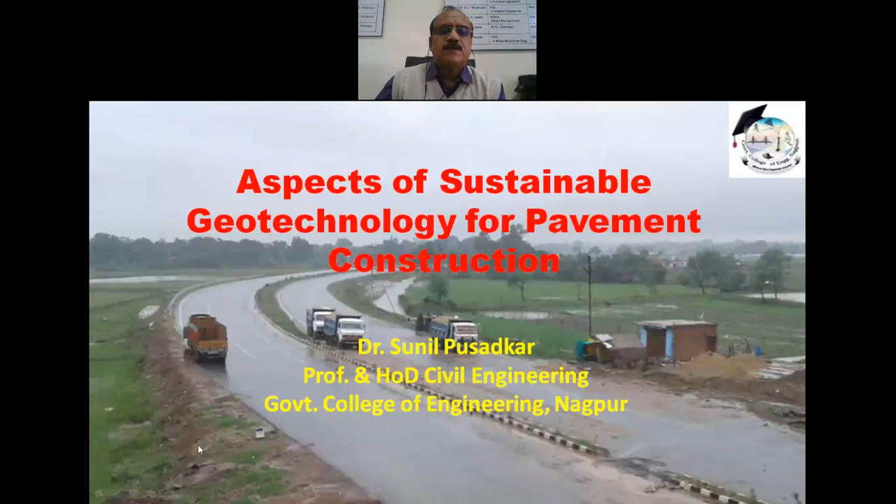the topic was aspects of sustainable pavement construction. I have changed it to my field, aspects of sustainable geotechnology for pavement construction. So in this, we are going to see the different materials and methods used for the improvement of the subgrade, and some aspects of pavement as well as slope protection with natural resources. So with this brief introduction, I will look to

my presentation. For transportation engineering, AASHTO 2009 has defined what sustainability should refer to, and it states that transportation's mission is no longer just about moving people and goods, it's much broader. Transportation fundamentally allows us to achieve economic, social, and environmental sustainability. So all three principles of sustainability are included, and transportation supports and enhances our quality of life. As state transportation professionals, we need to model the way towards a sustainable future. Sustainable transportation requires innovative approaches and partnership like never before.

So sustainable transportation engineering is not only the field of field engineers or only of researchers, but it is a conglomerate of all the persons who are involved in this process, and hence the responsibility rests with everyone.

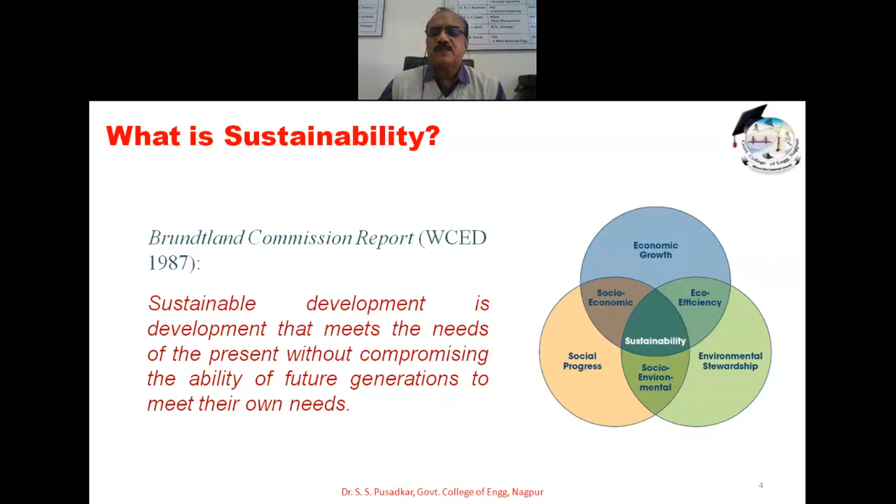Now, in the context of pavement, how should I make it sustainable? It should achieve the engineering goals for which it was constructed. That means for the road or railway pavements we are constructing, we have to keep the focus on the engineering aspect, but we also have to preserve and restore the surrounding ecosystem.

That is the main thrust which we should keep on sustainability: whatever way we are making the roads to any area, we have to preserve this ecosystem. And the best example is the construction of the national highway from Nagpur to Jabalpur. They preserved this ecosystem very soundly by providing many underpasses for the animals which are living in this particular area.

It also uses financial, human, and environmental resources economically. Definitely, for engineers the first fundamental principle is that you should go for economical design, and construction and maintenance should be kept minimum. Meet the basic human needs such as health, safety, equity, employment, comfort, and happiness. By the provision of pavement, we are able to provide these human needs, because if there is no road, no man can reach the hospital, no man can reach the office, nobody can even move.

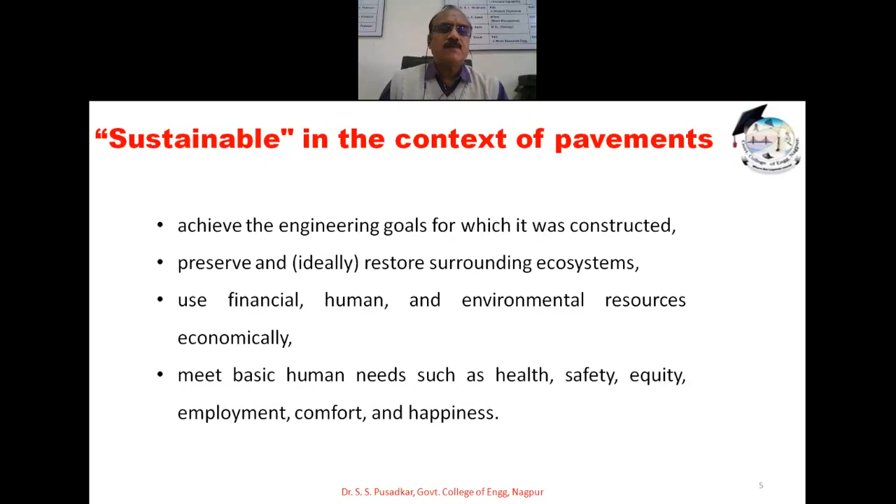And hence, if you keep this road network, which is more than lakhs of kilometers on the earth's surface, in a green way, definitely we will be able to preserve this earth in a sustainable way. Now, there are basically three parameters, as I discussed earlier: the environmental component, social component, and economic component of sustainability. With respect to pavements, it basically regards the energy consumption by the materials, during production, during construction, or whatever.

So the energy component plays a major role, because how much energy is required for preparing that particular material, or how much carbon dioxide is evolved during the preparation, we also have to take into account. Greenhouse gas emissions, noise, air quality, stormwater treatment, all come under this environmental aspect. If you look at the social aspect, it basically relates to safety, smoothness, vehicle operating cost, again the GHG emission through vehicles, access, mobility, and aesthetics. These are the various points covered under the social component for the pavement.

And the last point is economics. Definitely, we should achieve economy through construction, maintenance, and rehabilitation cost, and vehicle operating cost, crash cost also. So all these are the various points which refer to sustainability in pavements. But we will look at only two aspects: the energy consumption and the construction of these pavements.

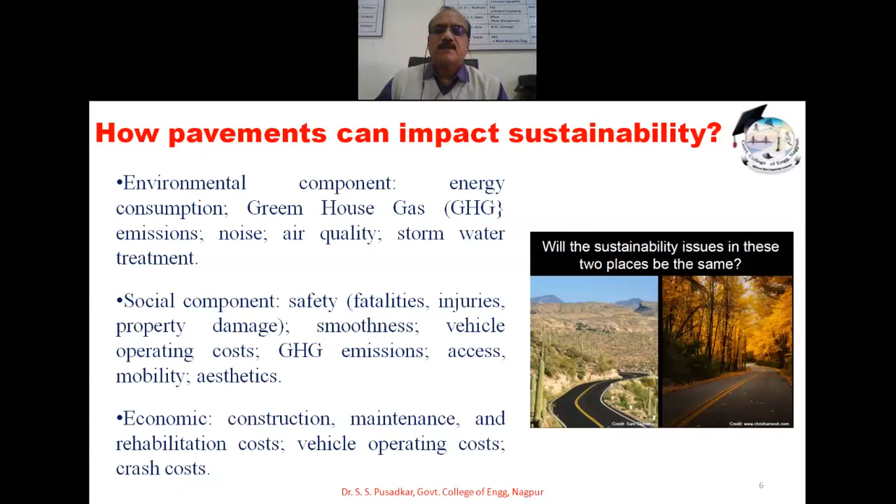Now, why the sustainability requirement plays a major role in the pavement. This graph is by Wagner, who has written Materials in the Economy. It shows how much of different varieties of materials were used in the last complete 100 years, the last one century. And out of all these materials, if you see, crushed stone, sand and gravel play a major role in the construction industry.

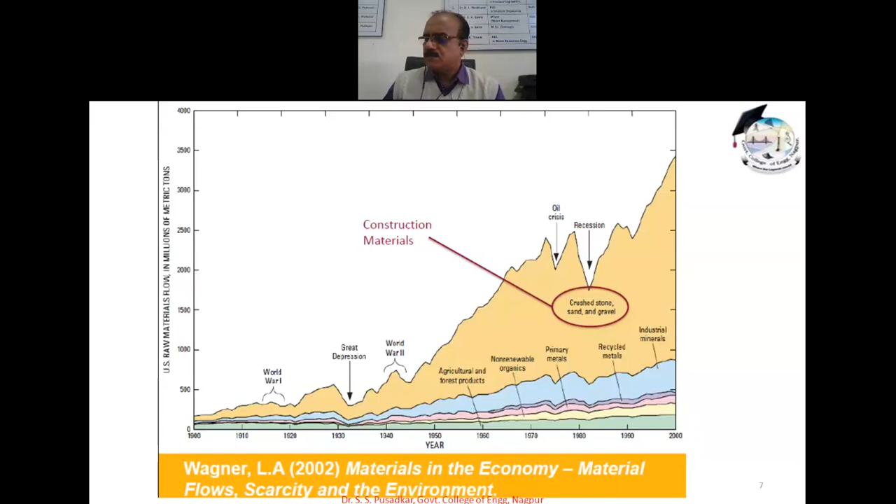Everywhere we are excavating material and using it for various types of construction. Most of the roads we are constructing are on the earth itself, and therefore there is excavation, there is construction of embankment. So a large amount of crushed stone, sand and gravel is utilized during the construction of these highways or any type of roads. Hence our prime focus should be on the construction material used for the construction of pavements.

Everyone knows about these two types of pavements. We have rigid pavements and flexible pavements, but all these pavements will be resting on the subgrade, that is the existing soil. Sometimes we need to improve the subgrade also, so that it is able to carry the load coming from the pavement or the concerned road. The rest of the portion above the subgrade will be sub-base course, base course and concrete pavement. The figure is the reverse way; that title is wrong, sorry.

And for flexible pavement we have the sub-base, base course and surface course, right? If you look at the flexible pavement, most of the material required is earth material; only the bituminous part is there. Even in rigid pavement, only the top is concrete pavement. That block is concrete pavement. So a lot of research and work is going on to reduce material utilization in the construction of roads. We will look at some of the areas where we are able to save material in the construction of these highways.

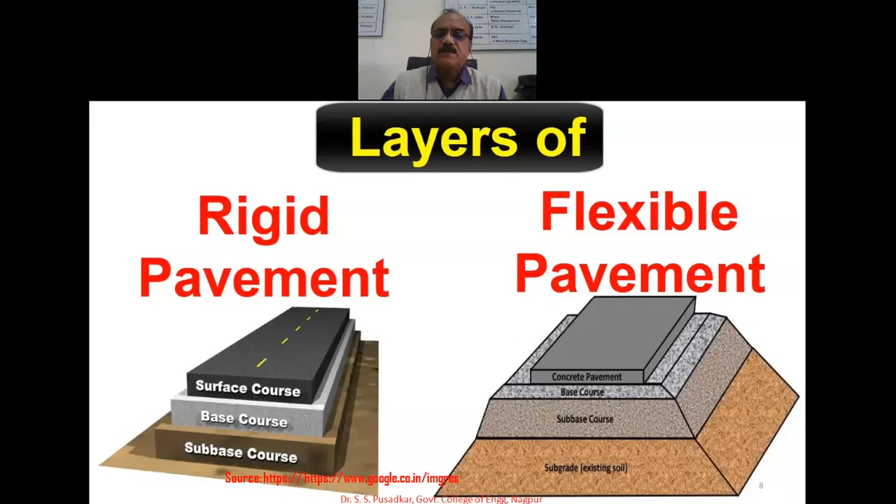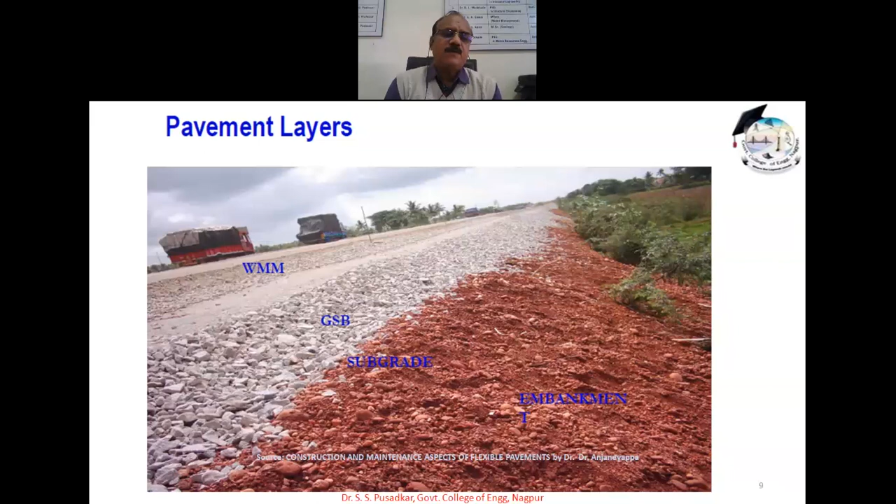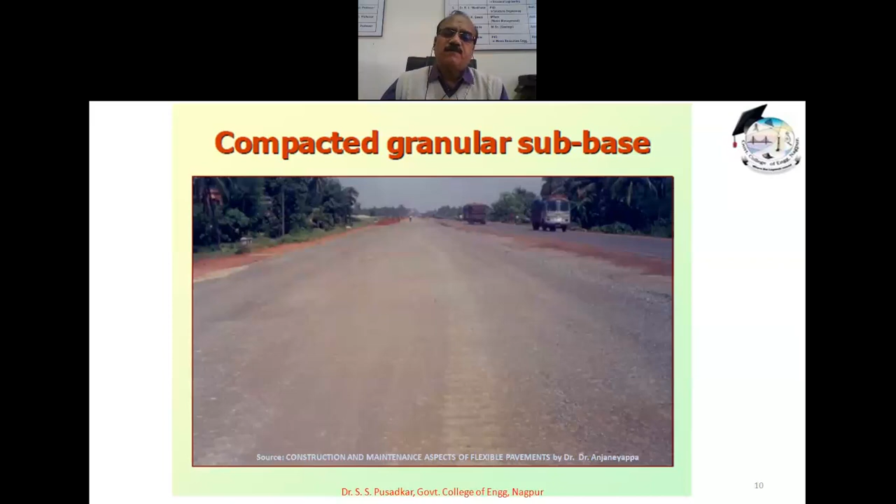And in these various layers we have, say, the embankment or the natural ground, then the subgrade, then GSB and then WMM, right? We can construct this sub-base also and compact it, and then we place our next layers on it. So how do recycled materials fit this requirement of subgrade as well as sub-base? Why do we need to use recycled material?

Definitely, if I use recycled material, I am taking a sustainable approach to pavement construction. I can avoid the energy and emissions associated with mining and processing construction materials. If I am using virgin materials excavated from the borrow area, I will dig out the hills, bring those materials and dump them for construction. So we consume energy for

excavation and construction, and a lot of that energy will be saved if I use recycled materials. The energy has already been expended in the first life of the recycled materials, so I can save it. It avoids the use of natural resources such as sand, gravel, limestone and oil. It also results not in landfill, but in comparable or better, longer lasting infrastructure.

Suppose bituminous roads exist now and we are constructing concrete pavements. The entire material is excavated, and then we start again placing the sub-base, base course and then the concrete pavement. Most of the material excavated from the existing road is nowadays being recycled and used in various ways. And a road made of recycled materials will definitely increase the service life

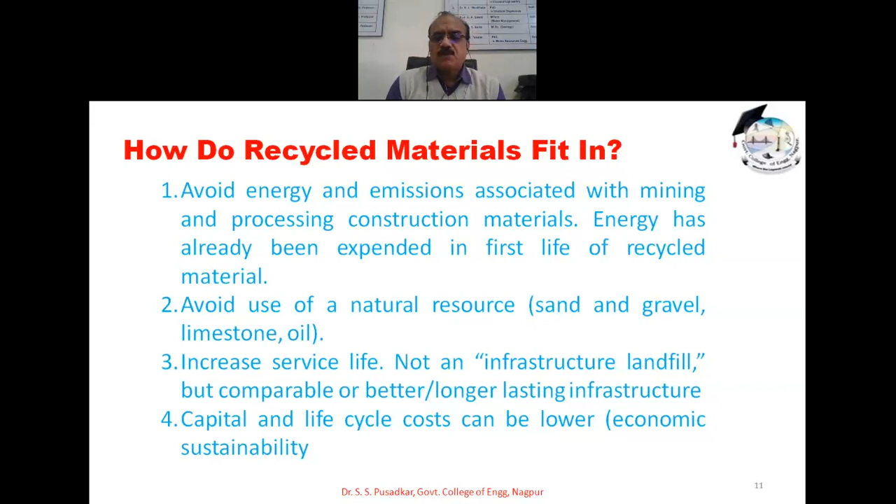also. Next, the capital and life cycle cost can be lower, so we can restore the third component of sustainability, economics. As we require two types of materials, coarse grained and fine grained, right, we will look at the different materials we can use as recycled material for the construction of sustainable pavement.

Recycled concrete aggregate: a lot of buildings are being demolished, concrete roads are broken too, so that material can be separated and the aggregate recycled and used. Similarly, if asphalt concrete is removed, you can recycle it, separate the aggregate particles, and reuse them. Similarly, foundry sand from iron casting can also be used in construction. Bottom ash from coal combustion.

During coal combustion, as everyone knows, there is fly ash, which is used in cement production or in embankment construction. But during the emission of fly ash from the thermal power station, the other ash which drops to the lower level we call bottom ash. Nowadays they separate fly ash and bottom ash. Bottom ash has the benefit that its size is about equal to sand and its specific gravity is low, so we can compact bottom ash in the embankment with a lighter load on the embankment.

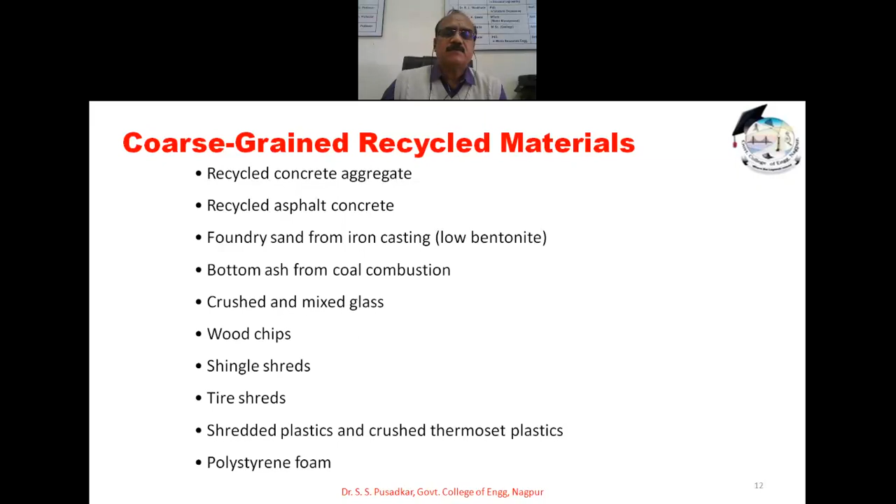Shredded plastic and crushed thermoset plastic. Work on plastic utilization has been carried out by many authors, and it is in practice too, but in a very limited form. And the last is polystyrene foam, which can be utilized as a recycled coarse grained material.

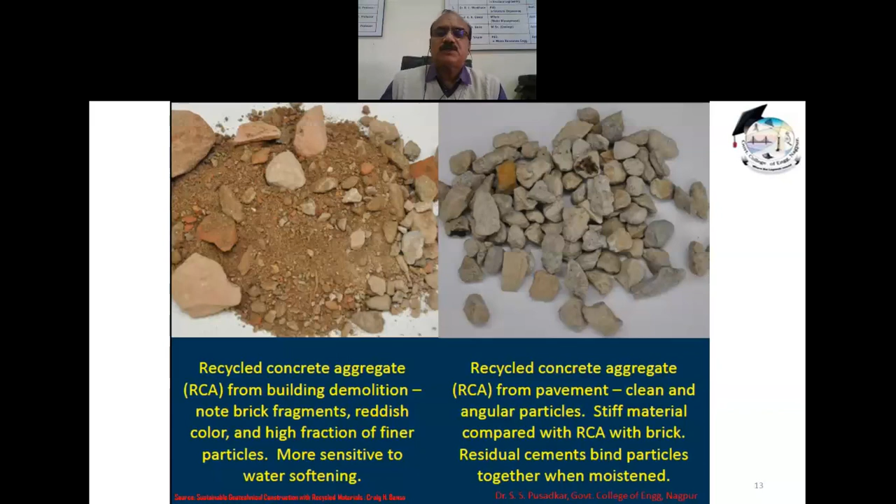This is what I have talked about, the bottom ash. It looks like a sand but has a lower specific gravity, and the particles are more prone to crushing. It can have contaminants because it is a mixture coming from the coal ash or thermal power station, so it may have contaminants. So we may need to segregate those contaminants, but it can be very widely useful as the construction material for the subgrade and the subbase.

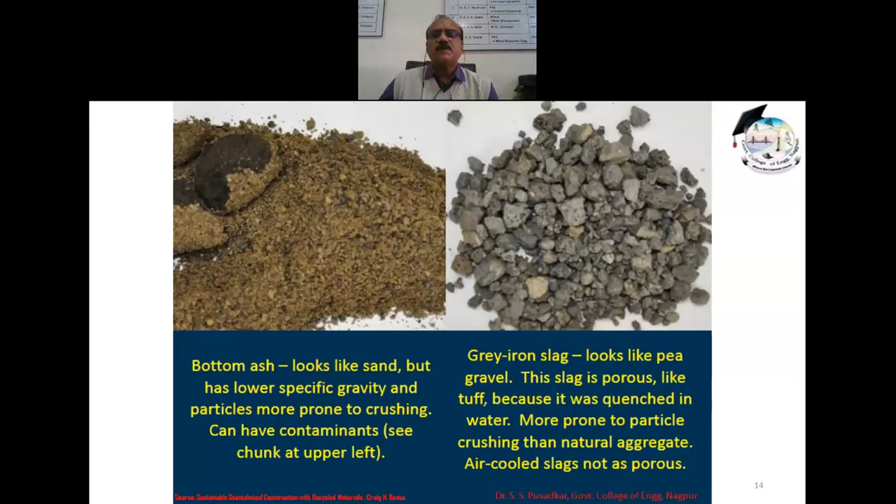Another is from slags from the factories. The grey iron slag looks like a pea gravel. This slag is porous, like tuff because it was quenched in water, so more prone to particle crushing than natural aggregates. So you have to take proper precautions,

and hence a lot of research is going on on the properties of these materials which you are reusing, because this particular material has gone through one cycle of its life, and they are under stress condition during utilization, and now we are separating them from the existing structure, releasing them from the stress, and again we will be cleaning it and then use it for the next construction of the pavements.

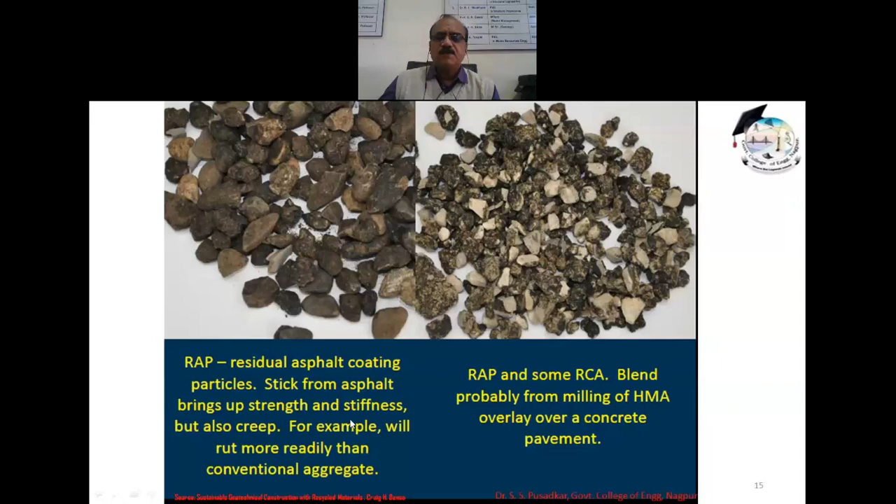Okay. This is another, about the tire. Shredded tear-off shingles contaminated with the wood chips, lightweight but compressible, and hence they also creep and are temperature sensitive. So you can use the pieces of your tire in the construction, or you can shred it into small particles, and then you can use the shredded tire chips.

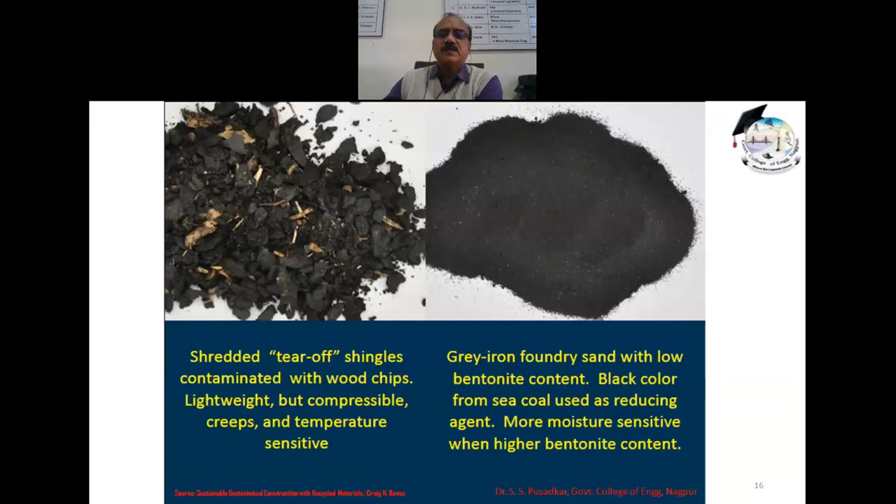Also, you can use the sand which is obtained from the foundry, grey iron foundry, with low bentonite contents. They are black color from sea coal used as the reducing agents. They are more moisture sensitive with higher bentonite contents, and hence you have to take a proper precaution again utilizing these waste materials. They can be used for lightweight fill such as tire, foams, crushed thermosets, embankments, base and subbase courses for pavements, drainage media, structural fill for slabs and retaining walls.

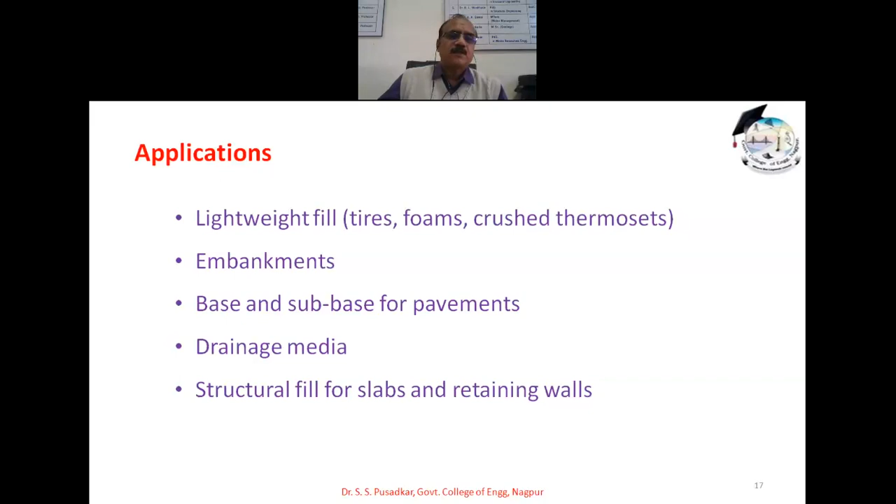Similarly, we have some of the finer materials or fine grained materials which can also be utilized as the recycled materials, such as, as I said, the fly ash. Some fly ash are self-cementing, some fly ash are non-cementing. So self-cementing fly ash and non-cementing fly ash should be separated and utilized either in the construction of pavement or the production of your cement.

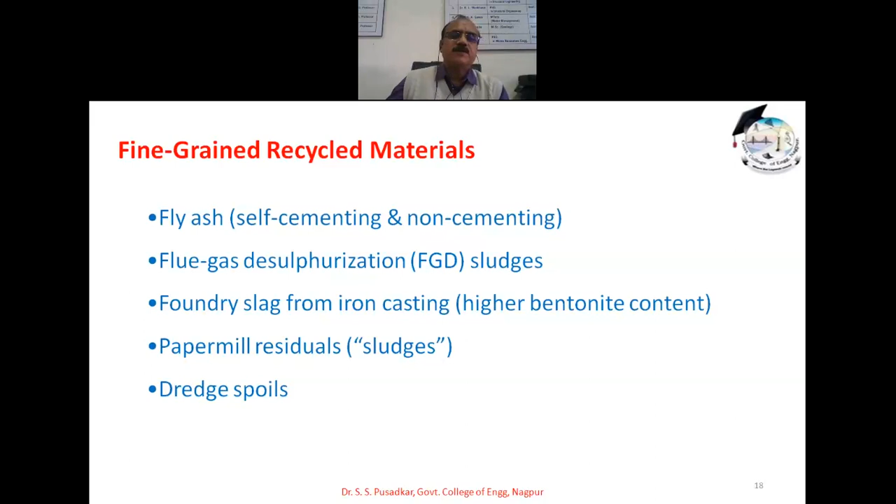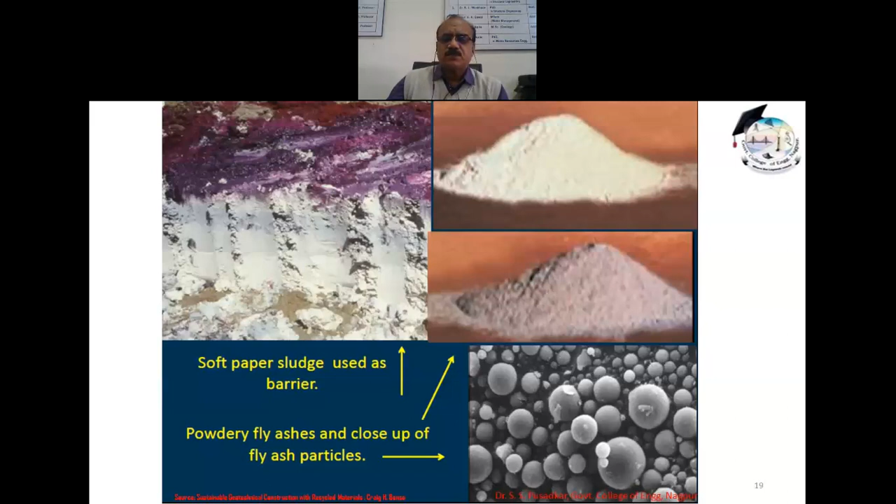The flue gas desulfurization sludges, that is called FGD, foundry slag from iron casting, which contains higher bentonite material, paper mill residuals as sludges, dredge spoils. These can be used as fine grained recycled materials during construction of pavements. It shows some soft paper sludge or the ash contents, with the microstructure of the ash also shown there. You can use these FGD gypsums which I discussed earlier.

It may be used, it addresses the problem of plasticity, but the problem is that it is used as an agriculture amendment or for drywall production. So mostly it is used for the drywall construction.

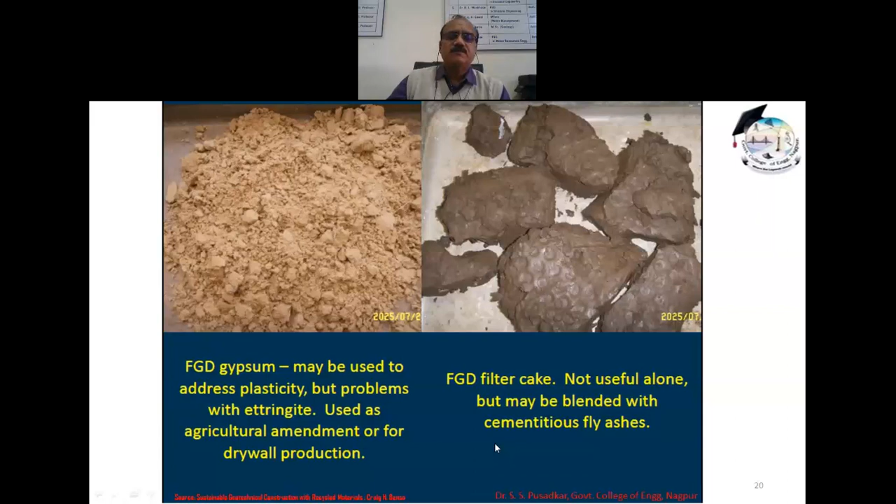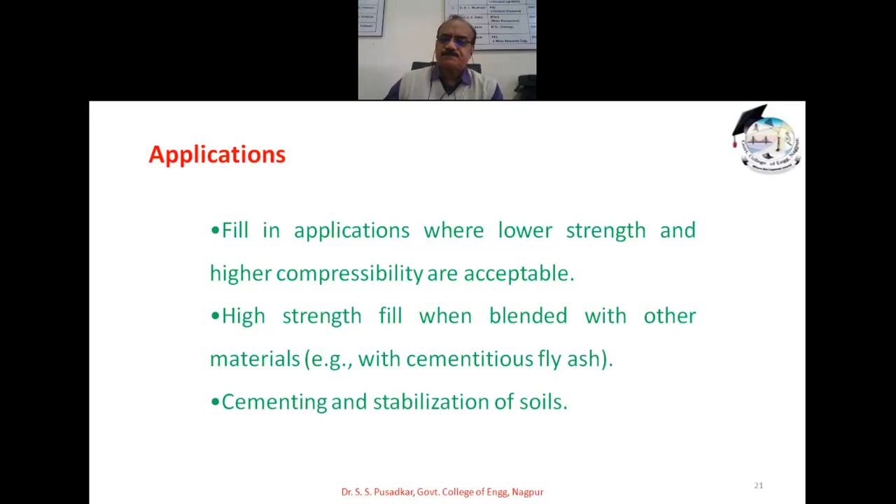The FGD filter cake can be blended with the cementitious fly ash, and you can make aggregate using those materials also. So we can use these recycled fine aggregate materials as fill in applications where lower strength and higher compressibility are acceptable, high strength fill when blended with other materials, and cementing and stabilization of the soils. So we can use these fine grained recycled materials in this variety of applications.

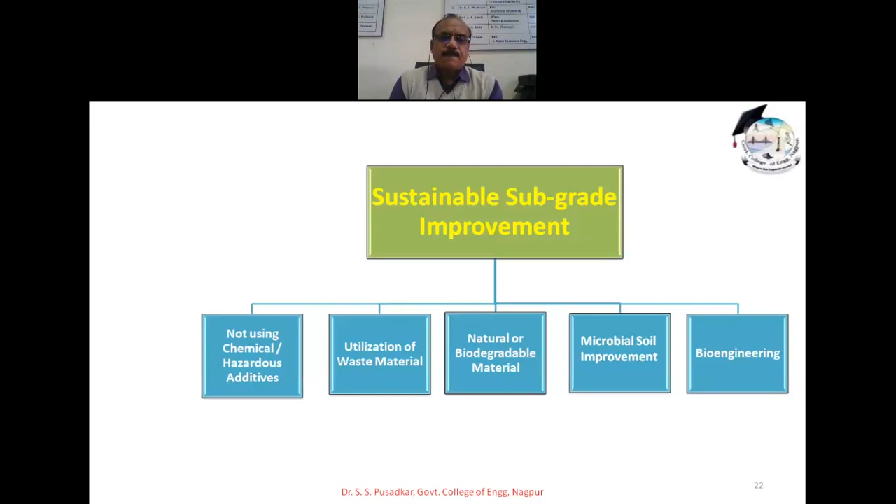Now, while understanding these various recycled materials, we are using them in the construction of pavements. Also, wherever we have existing ground, it may be a weak soil which cannot bear the load of pavements, and therefore we need the improvement of the existing soil. And definitely there are n number of methods which are available at present for improvement of the soil. So we can use,

if we want a sustainable subgrade improvement method, that is, soil improvement methods, definitely my material should not be using chemicals or hazardous additives for improvement of the soil. If I use the waste material, definitely it goes a green way, or I can use some natural or biodegradable material for improvement of the soil, or the new recent research which is going on throughout the world on utilization of microbes in soil improvement.

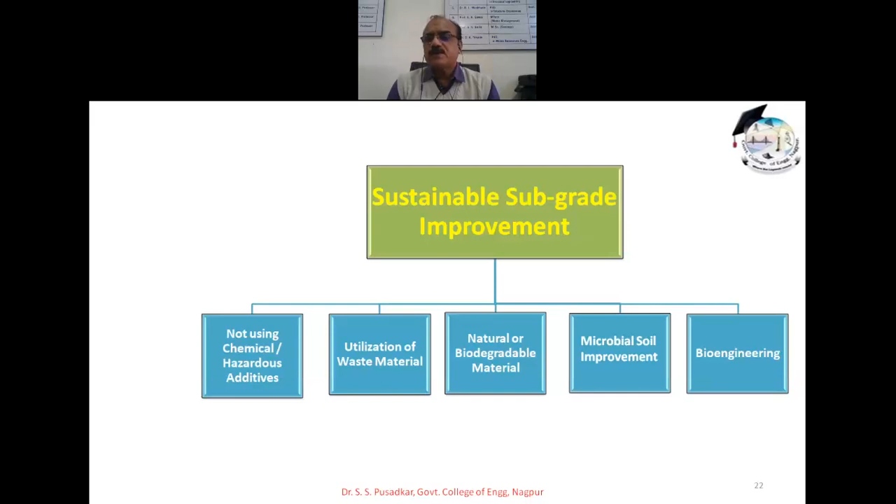So I will give some focus on bioengineering aspects - how existing trees or grass hold your soil mass together, and how we can utilize this for slope protection from erosion. So I will majorly cover these three aspects: natural or biodegradable materials, microbial soil improvement, and bioengineering.

Now, ancient people also worked on soil improvement, but at that time they used 100% green methods to improve the soil. Professor A.S. Nene from VNIT Nagpur worked on soil improvement materials used in ancient days, as mentioned in the Rigveda, and he published a book on ancient soil improvement.

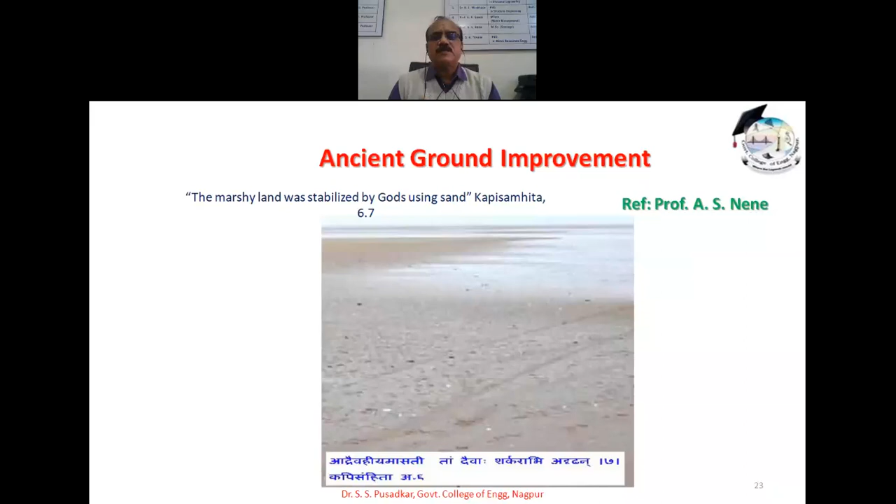He mentioned that marshy land was stabilized by gods using sand - that was in the Kapisamhita, 6.7, he says. But that means soil can be stabilized, marshy land can be stabilized, not by the god, but by using sand. When sand is mixed with marshy land, over time it gets improved with consolidation and the overburden taking place on it, converting it into stable land.

They also mention that if the ground is waterlogged, the water should be drained out by digging drains parallel to the northeast and refilling the trenches with brickbats and stone so that excess water drains out. Whether it is northeast or southwest depends on your natural ground slope. For waterlogging problems in areas of higher irrigation, we use different methods, but this natural process tells us we can refill with brickbats and stone similarly.

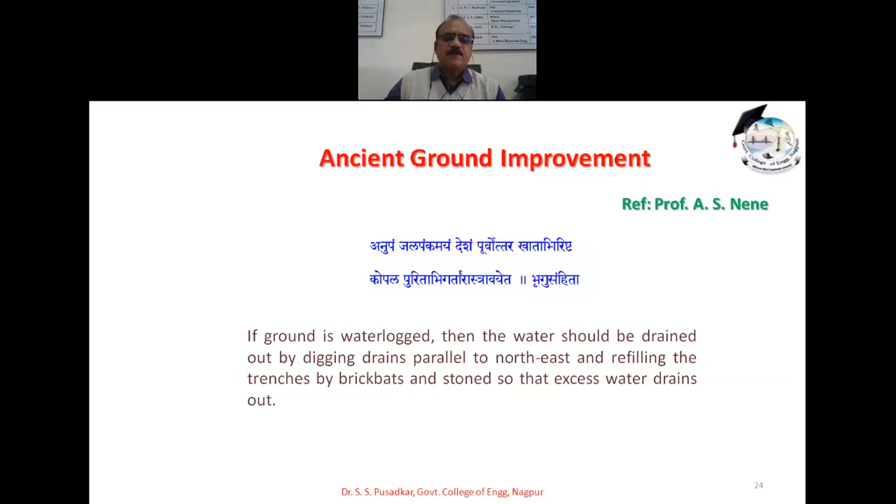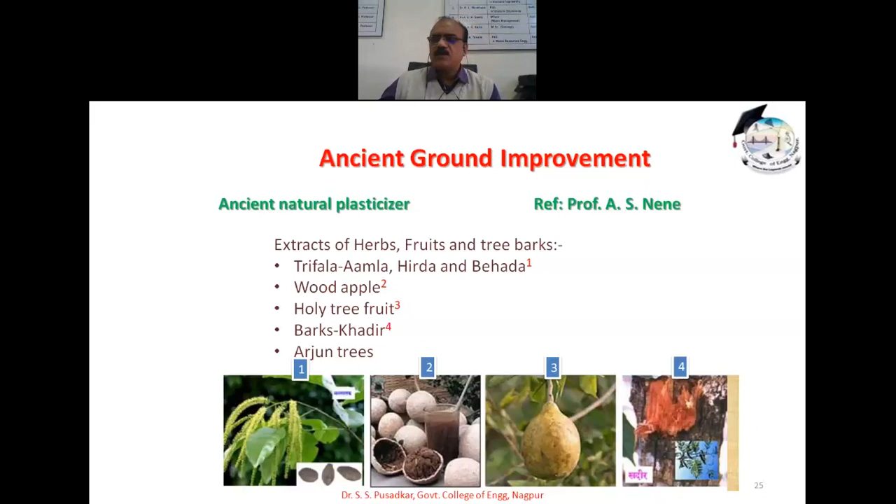Now, to find the suitability of all these natural materials for soil improvement construction, a lot of work has been carried out by Professor Nene, and some work under my guidance has been carried out by students on utilization of these materials for soil improvement. So I may discuss a few of them.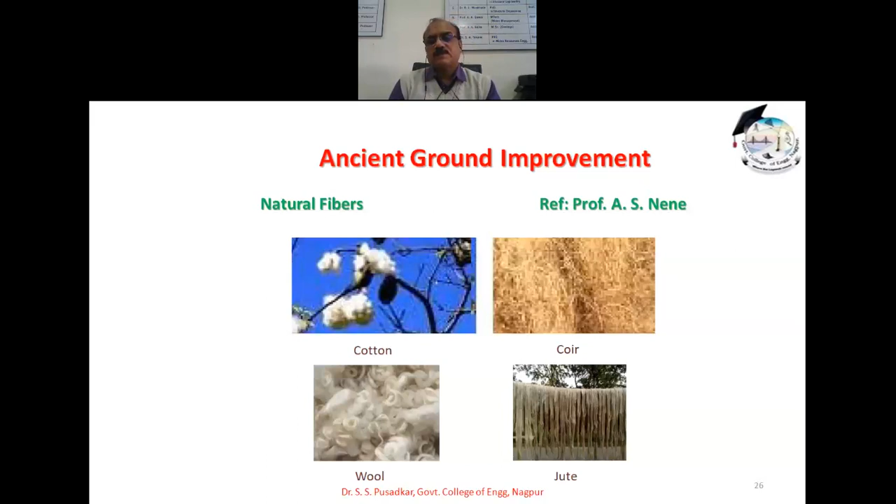At that time, natural fibers were also utilized, such as cotton, coir, wool, jute - and nowadays we use coir and jute as ground improvement textile material at different levels. Similarly, there were other natural polymers - cow dung, jaggery, coconut water was also a good plasticizing polymer, eggs, green algae, and burned coconut shells. These were used as natural polymers, and all these are sustainable materials.

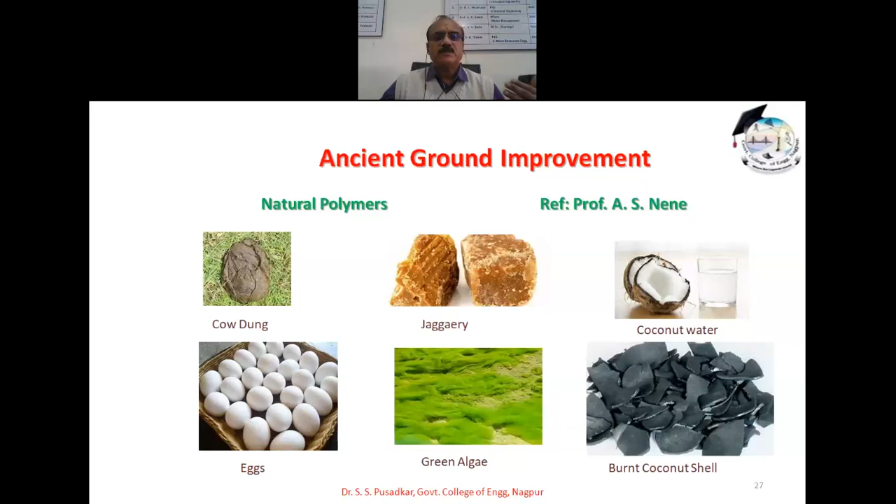Basically, because chemistry had not evolved to the extent that it could change the properties of materials, people initially tried to utilize only existing materials on earth, and we are using these now. This is work presented by my student Palash Dongare.

He used bael fruit powder to check the change in properties of black cotton soils. To our surprise, we found that even using just 1% of this powder in black cotton soil, its unconfined compressive strength increased by nearly double, depending on how many days the mixture was cured. This graph indicates how the unconfined compressive strength increased from 128.15 to 419, just for 1% of this bael fruit powder.

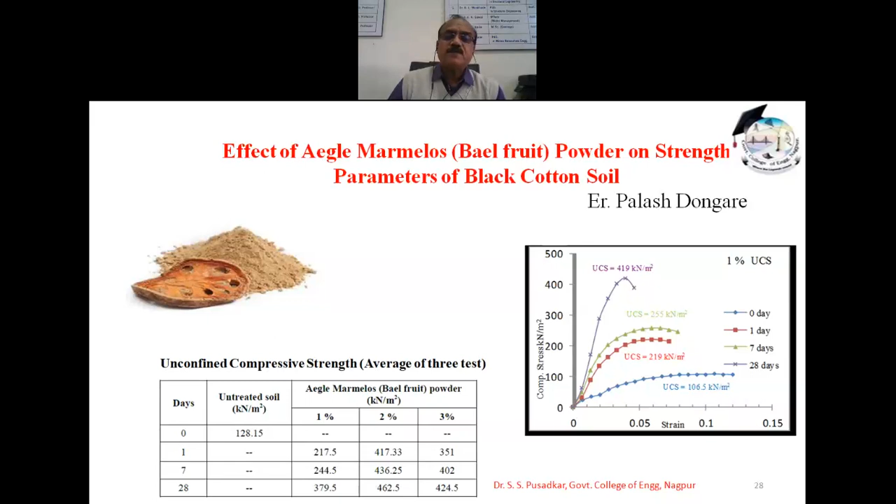So definitely, natural materials can be used, and this bonding - of course further work is necessary to determine whether it is durable, whether this binding that has developed will remain forever during the life of that particular material.

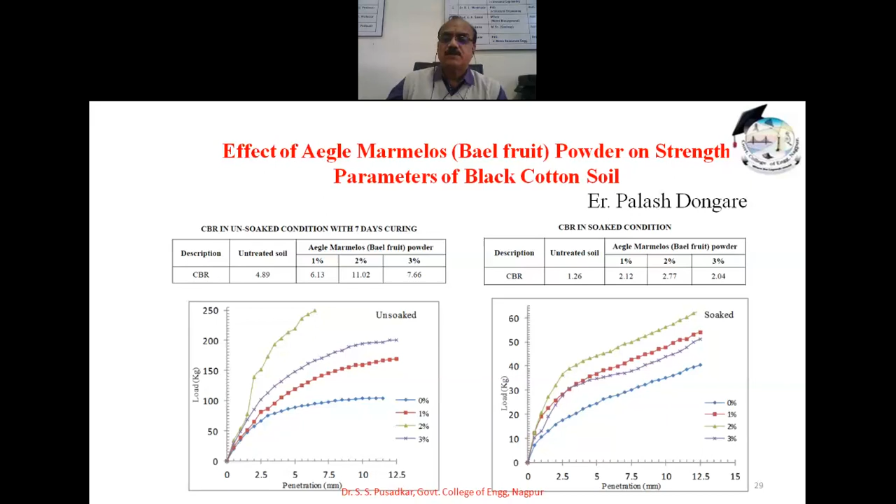These are the CBR values which show improvement from untreated soil to 4.89, maximum 11% in unsoaked condition. In soaked condition, from 1.26 to even 2.77 - around 2.5 times increase in CBR was also observed by using bael fruit in black cotton soil. So this is a good natural material which you can utilize.

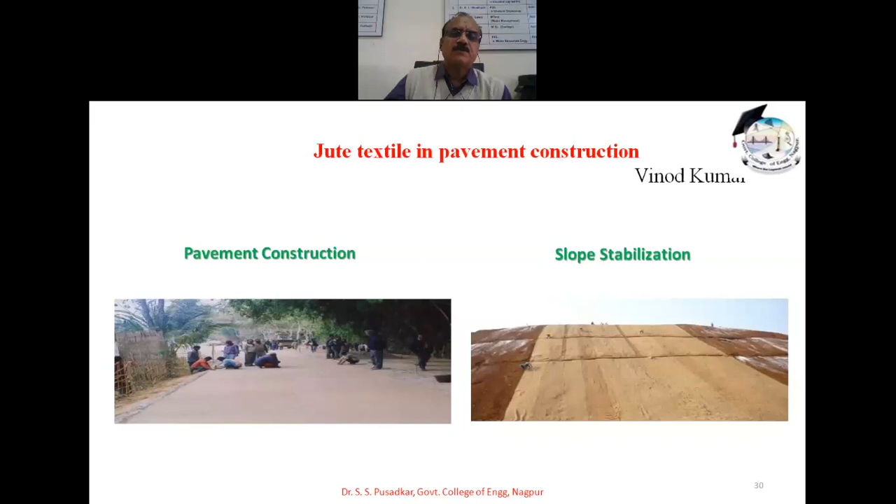Jute textile in pavement construction everyone knows, so I won't elaborate much on that. We can use it in pavement construction as well as a slope stabilization product, just like your geotextile materials. A lot of research has been carried out on jute to use it in different forms in pavement construction. This is a very good sustainable approach for construction and improvement of the soil as well as protection.

Similarly, the coir fibers - basically jute work is going on mostly on the northern side, whereas coir fiber work mostly goes on the south side. They have turned these coir fibers into a variety of mats, geocells, or geotextiles, and are utilizing them for the improvement of the soil. This figure shows bearing pressure on a footing, and how it increases with different types of coir fibers or coir fabrics used - one as a mat, other as a geocell.

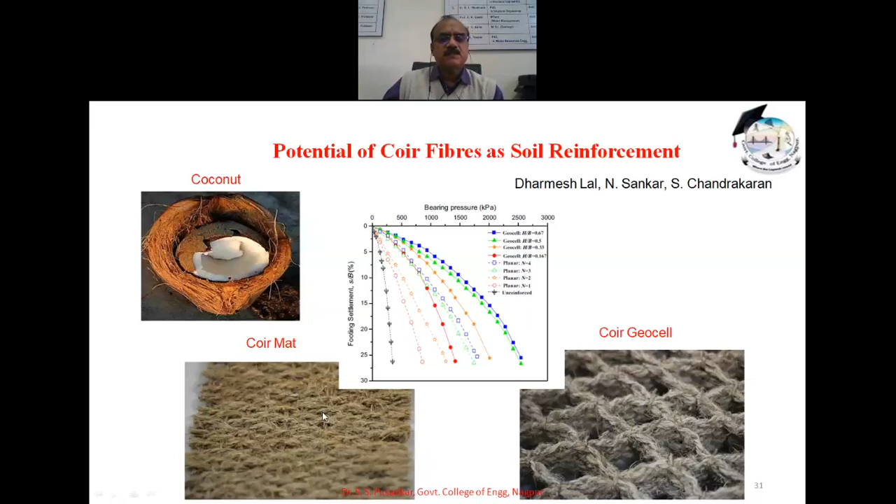So of course, some treatment is required to reduce the degradation of these natural materials. Otherwise, we can definitely use natural fibers for the construction of pavements as well as improvement of the soil. This is another fiber used as a natural fiber - banana fibers.

In Maharashtra, we know that in Bhusawal and Jalgaon regions, a lot of people are growing bananas, and there are some industries in that area which convert the stem fibers into fiber mat and banana cloth, and individual fibers can also be utilized. This also shows how this is improving the CBR value by using these banana fibers.

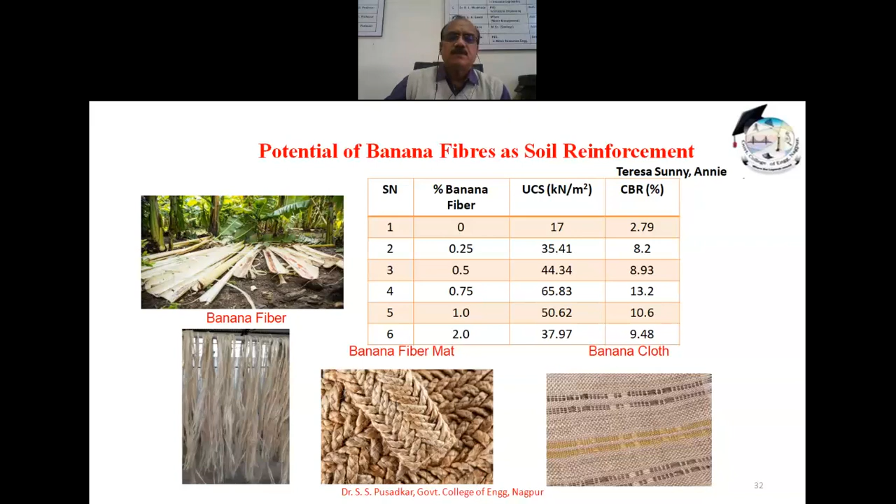One of my PhD students is working on the utilization of banana fibers for soil improvement. So I will not put their results here since it's their ongoing research work - I'm just mentioning that they are working on that issue.

Another burning topic today is microbial soil improvement - soil improvement carried out with the help of bacteria is called microbial soil improvement. In the last 5 years, a lot of work has been done in this area. Of course, actual field practice is yet to be demonstrated and will take some time, but it will evolve as a good material - this bacteria - for soil improvement.

These bacteria are also used in concrete. There are bacterial concretes available, self-healing concretes also available. So these bacteria which are around us can be utilized in a better way if you treat and utilize them properly.

Biology in the evolution of geotechnical engineering is leading to the emergence of biosoils as a sub-discipline. Now we have geotechnical engineering, foundation engineering, geoenvironmental engineering - this biosoils will also come up as a separate discipline in the near future.

The potential of biology to modify engineering properties of soils, length scale of biological processes, methods of application, potential improvements to engineering properties through this biochemical process - treating bacteria with soils involves a lot of actions and reactions between the bacteria and materials, because soil contains all types of minerals. We have to see how this will react with different materials, and soil contains lakhs of bacteria, so we have to introduce such bacteria which will improve soil properties - not all bacteria will improve soil properties.

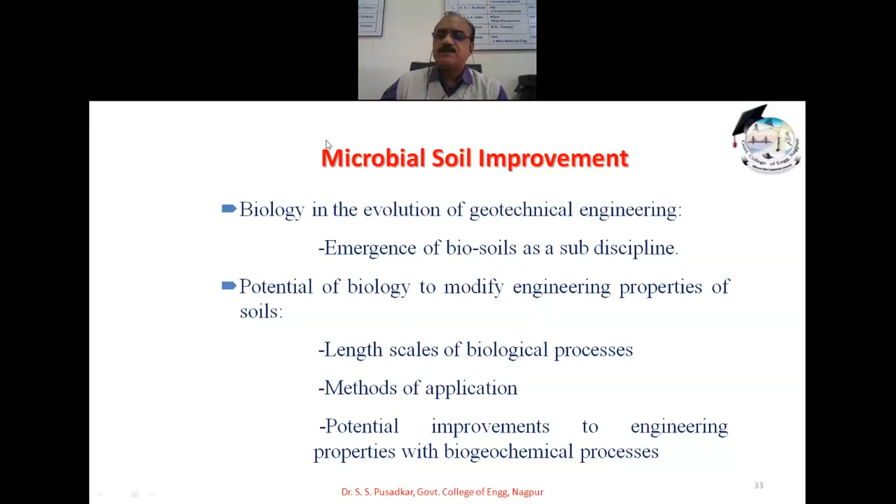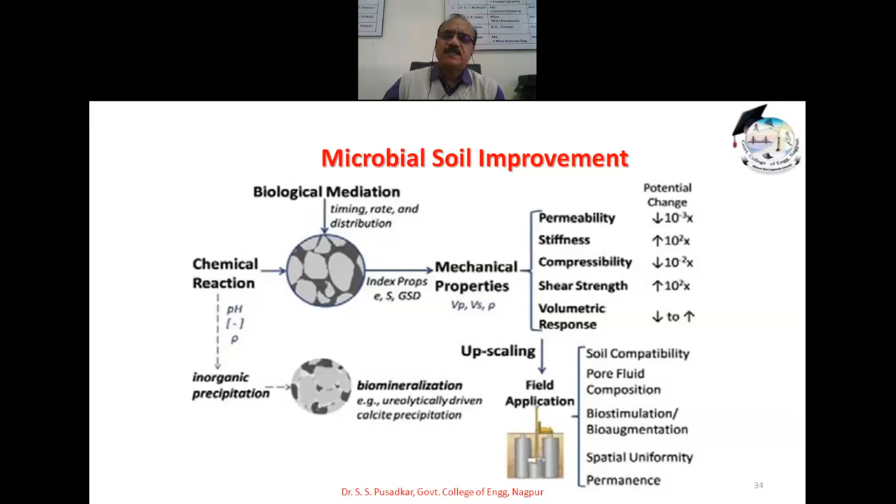So we can apply this in the field for soil compatibility, pore fluid composition, biostimulation, bioaugmentation, spatial uniformity, or permanence. There are many ways you can use it in field applications, but that is also just at the model study stage, not yet applied directly in the field.

So first, we understand these microorganisms are found in almost every habitat present in our nature, as discussed. Microorganisms are vital to humans and the environment. They are present in soil and influence soil structures, and microorganisms can be grown easily for multiple purposes.

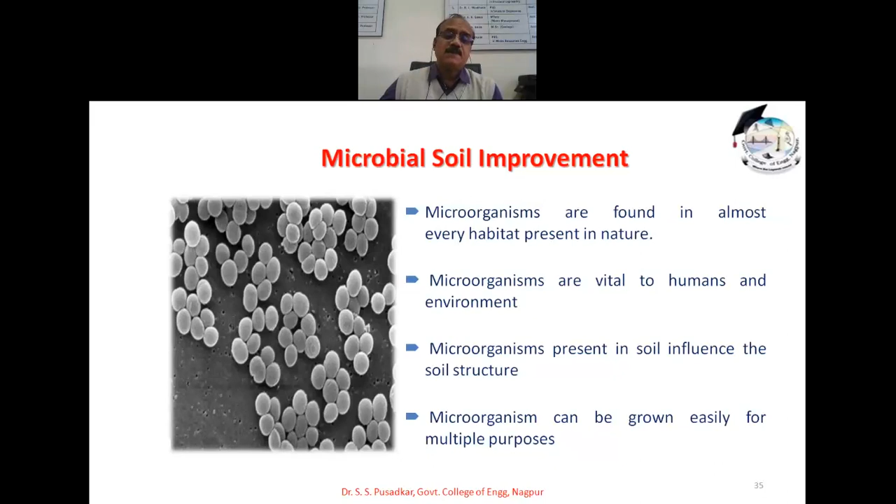What is the function of these microorganisms which are used for soil improvements? Microbes play important roles in soil. They participate in earth element cycles such as nitrogen and carbon cycles. The functions of microorganisms include decomposition of organic matter, cycling of minerals, plant uptake of minerals, etc.

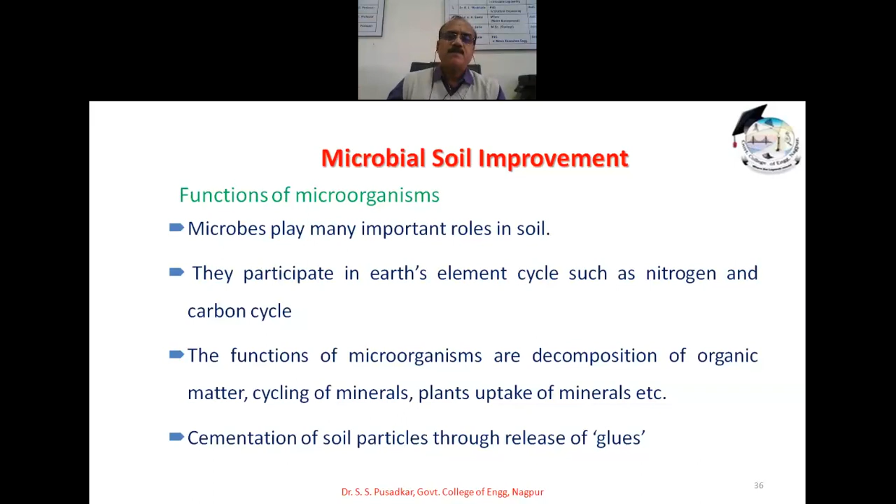Cementation of soil particles through release of glues. This is the last point, and is the most important from the soil improvement factor, that whatever glues are released by this bacteria, how we can use that for cementing the soil particles and improving soil properties.

There are many types of bacteria, but in this class I take into account only 4 types of bacteria which are required for soil improvement. One is photosynthetic organisms, that is cyanobacteria and algae. The sulfate reducing bacteria that are responsible for dissimilatory reduction of sulfates. Organisms utilizing organic acids. Organisms that involve the nitrogen cycle, either ammonification of amino acids, nitrate reduction, or hydrolysis of urea.

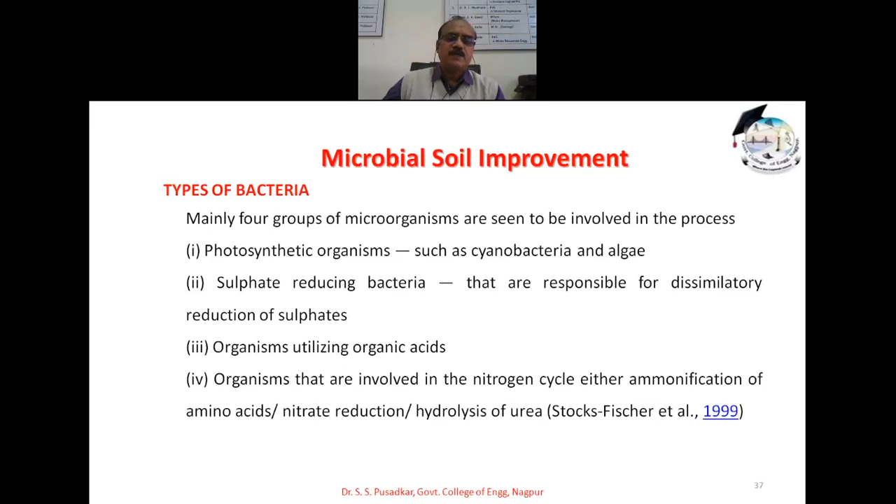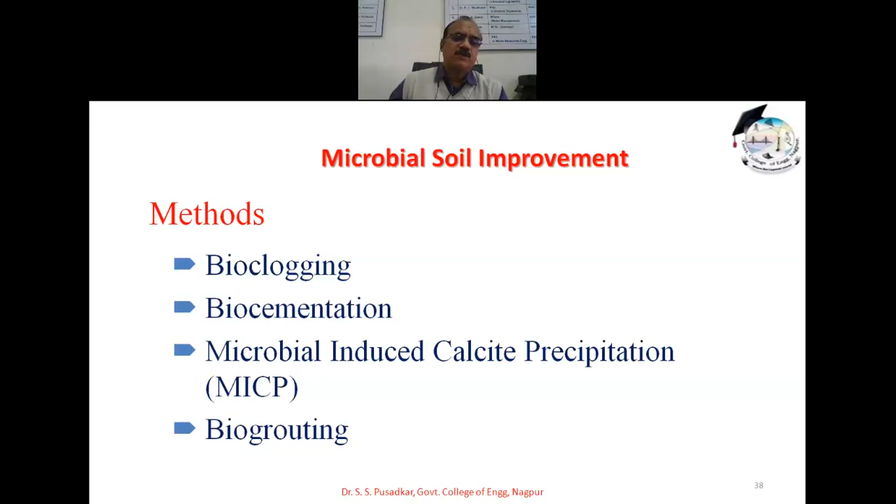There are 4 different methods which can be utilized for making changes in soil properties, either by bioclogging, biocementation, MICP (microbial induced calcite precipitation), or biogrouting. So we'll see in short all these 4 methods.

The first is bioclogging, meaning we know the original soil has a lot of voids, and if I'm able to build up bacterial growth and cement these particles together, it fills in the voids. So definitely the particles get attached to each other, and the voids also get reduced, so permeability will be decreased. This bioclogging is the production of pore filling materials through microbial means, so that the porosity and hydraulic conductivity of the soil can be reduced.

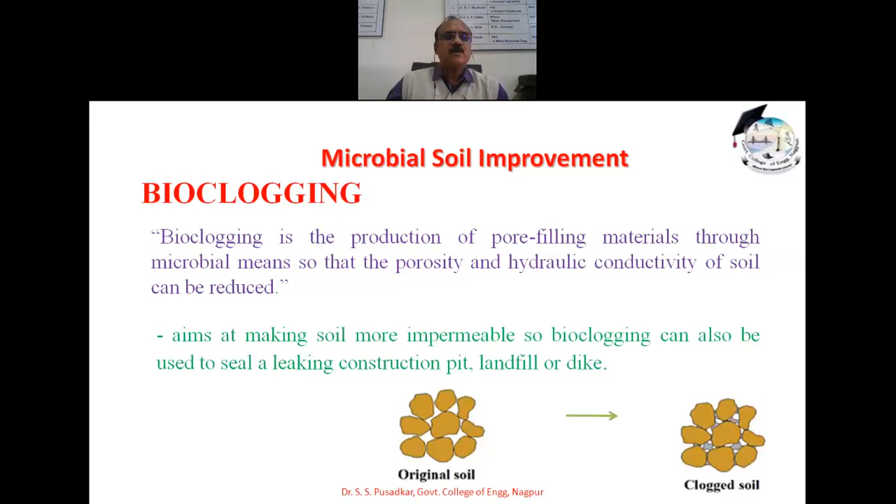So it aims at making soil more impermeable. Bioclogging can also be used to seal a leaking construction pit, landfill, or dikes. It has no direct relevance to pavement, but since I am describing microbials in detail, I take all this area where it can be utilized.

The production of bacterial exopolymers in situ can be used for ground improvement. If I am using particular exopolysaccharide producing bacteria, it also improves the ground by reducing permeability. This concept is also used in earthquake liquefaction mitigation and long-term stabilization of soils. Application of ammonium solution decreases the hydraulic conductivity of soils. So this bioclogging helps tremendously for soil improvement.

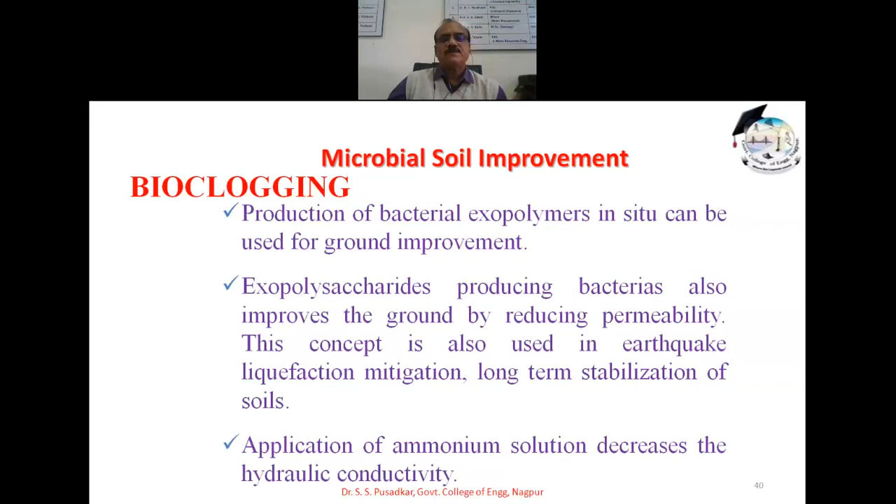Then comes cementation, biocementation. That means we are integrating the particles with each other, attaching the particles with each other with the help of this bacteria. This biocementation is the generation of particle binding materials through microbial processes in situ so that the shear strength of the soil can be increased.

It is the formation of soil particle binding materials with the aid of microbes and their additives. So the shear strength, which is meant for bearing the load, is definitely increased by using proper bacteria with proper treatment, showing improvement in strength.

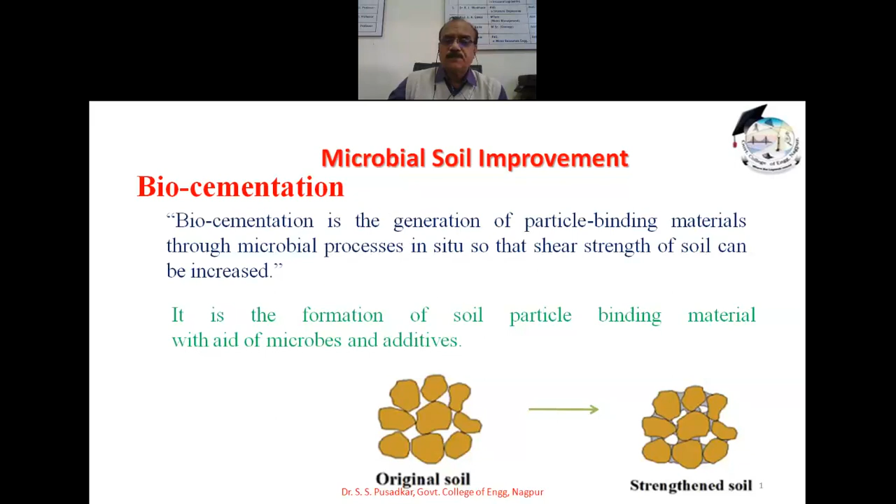The binding of soil particles with the sulfides of metals produced by sulfate reducing bacteria is useful for biocementation. Binding of soil particles with the carbonates of metals produced due to the hydrolysis of urea is also used for biocementation. Binding of particles can also be performed with ferrous and ferric salts and hydroxides produced due to the activity of iron reducing bacteria. So these three bacteria - sulfate reducing bacteria, urea hydrolyzing bacteria, and iron reducing bacteria - help in developing cementation in soil particles.

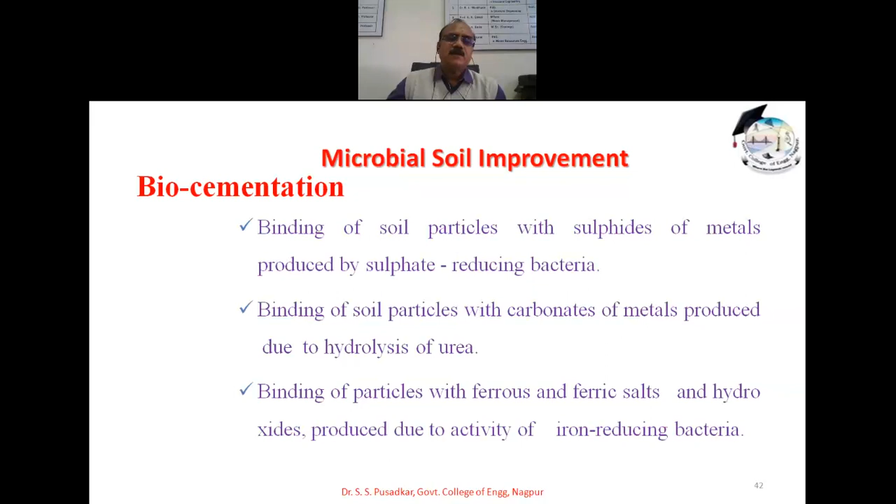Then this broad area is microbial induced calcite precipitation, biobinding, the formation of particle binding cellular chains. By oxidation, reduction, dissolution and precipitation of organic substances, stable and strong binding of soil particles can be formed. These four phenomena have to take place in soil with the help of this bacteria, and then we can definitely improve the soil.

So bacteria have a typical size from 0.5 to 3 microns. Mainly it is used for sandy soils, because sandy soil is porous and the bacterial liquid or growth will be penetrated into the sand easily, giving us a uniform mixture of the sand and the bacteria.

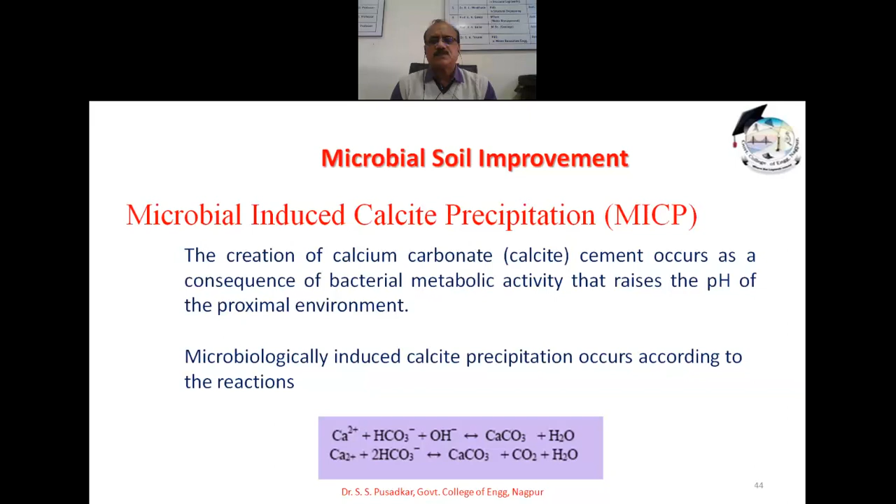The creation of calcium carbonate cement occurs as a consequence of bacterial metabolic activity that raises the pH of the proximal environment. So microbiologically induced calcite precipitation occurs according to these reactions. A lot of chemistry is also required for understanding this MICP process.

Then you can go for biogrouting. We know cement grouting, chemical grouting, everything are used for improving the soil properties. But even if I use cement grouting or chemical grouting, they have the limitation that we are puncturing the chemicals into the ground, and over a period of time, sometimes leaching takes place, and those chemicals which are used in groutings will be contaminating your ground as well as groundwater, and hence definitely

they are not safe. So if I am using this bacteria as a grouting material, it will seal the cracks, it will make the soil impermeable and improve your properties. So biogrouting decreases permeability up to 98%, and definitely when it's sealing the cracks, it will bind the particles, so it will increase the strength up to 12 MPa for that particular type of sand which has been tested. It includes injection of a specific group of microorganisms into the soil mass which connects the existing sand grains and therefore increases the strength of the material.

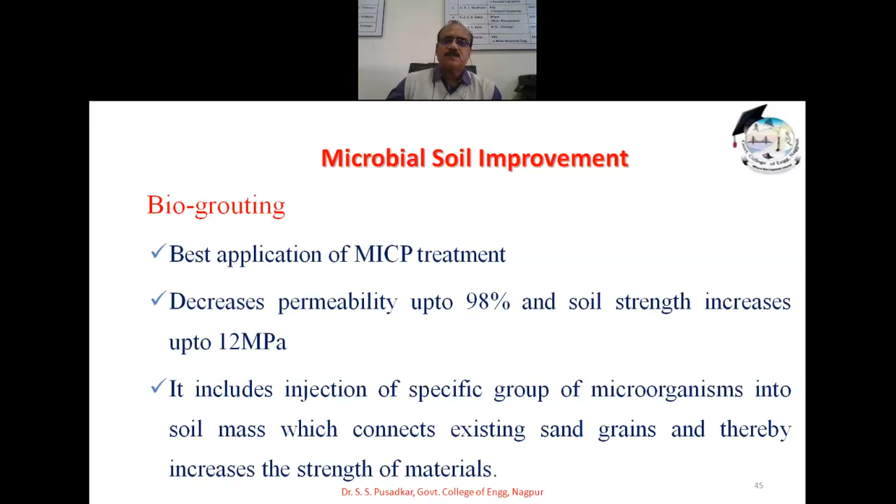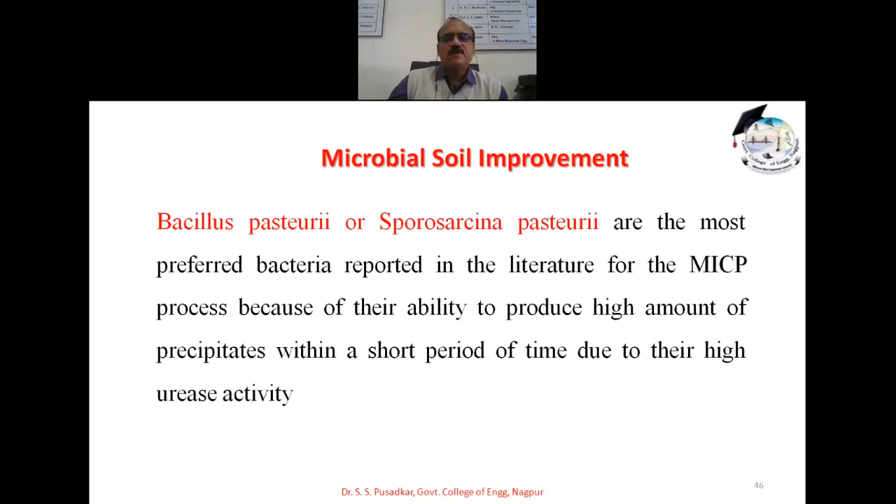In soil improvement, the bacteria which is used majorly is Bacillus pasteurii or Sporosarcina pasteurii. So the pasteurii group bacteria is mostly useful in MICP because of their ability to produce high amounts of precipitates within a short period of time due to their high urease activity. Most of the research work has been carried out with this, but many people are using different types of bacteria. One of my students is also working on this microbial soil improvement. She is using about 4 different bacteria, and the work is on the verge of completion.

I am just putting some of the bacteria which have been referred in the literature by various authors, and they show how the soil properties have been improved. With Sporosarcina pasteurii, the UCS has increased up to 12 MPa because it improved the strength with the formation of calcium carbonate. Then another author has used Sporosarcina pasteurii. The stiffness increased significantly only after 1 day. Ivanov used a ferrous or ferric salt based biogrout, the permeability is reduced to a great extent. And Soon Lee and others used MICP treatment. The shear strength and permeability show improvement. I have shown only very few. A lot of material is available on this microbial soil improvement.

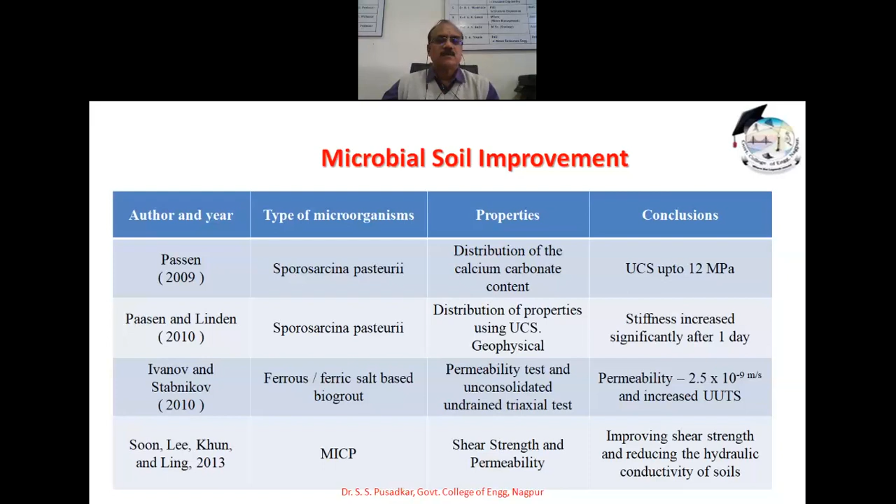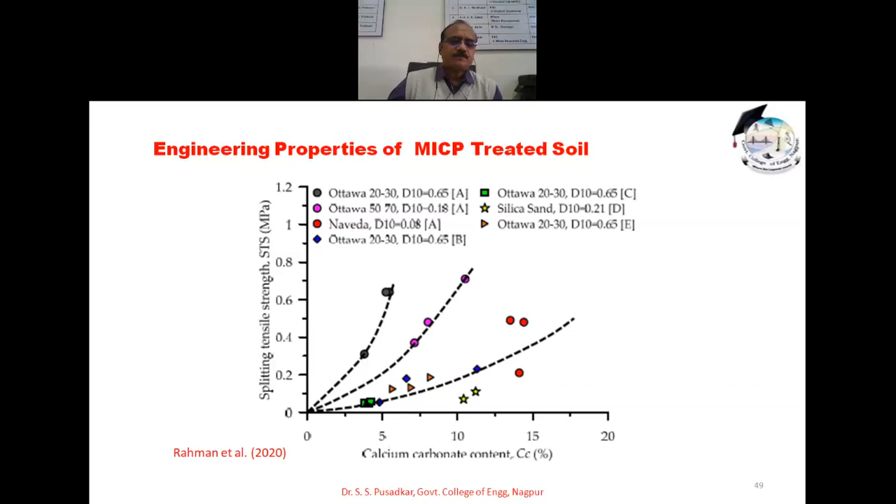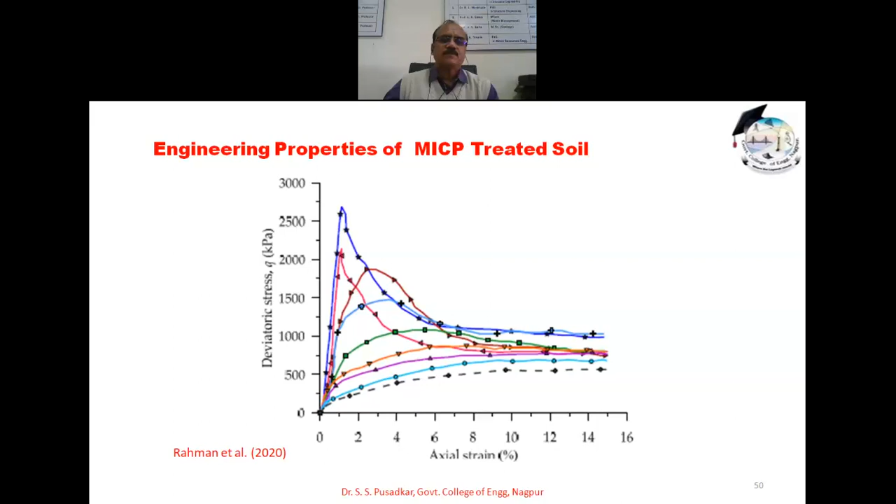Now, the same author has worked on the sustainability aspect of this microbial induced calcite precipitation. So, it is a state of the art review of microbial induced calcite precipitation and its sustainability in engineering applications. And since he has connected his review work with sustainability, I had taken only the sustainability part and some of the results to show you the improvement in the soil property because of use of these microbes. For understanding the sustainability analysis, he had taken 3 different models.

So, for example, the configuration of CBP, that is, the pavement containing only granular base course, here only the granular base course is used, and he did this analysis only for the paver block road. Okay, so you can implement the same system for other types of road also. But definitely, if I use it for different roads, I may get different results on sustainability. In the second case, he had taken sub base, base course, and then a paver block. And in the third case, he had stabilized the sub base course, and the paver blocks. Right. So we will see how these 3 different types matter in the sustainability analysis.

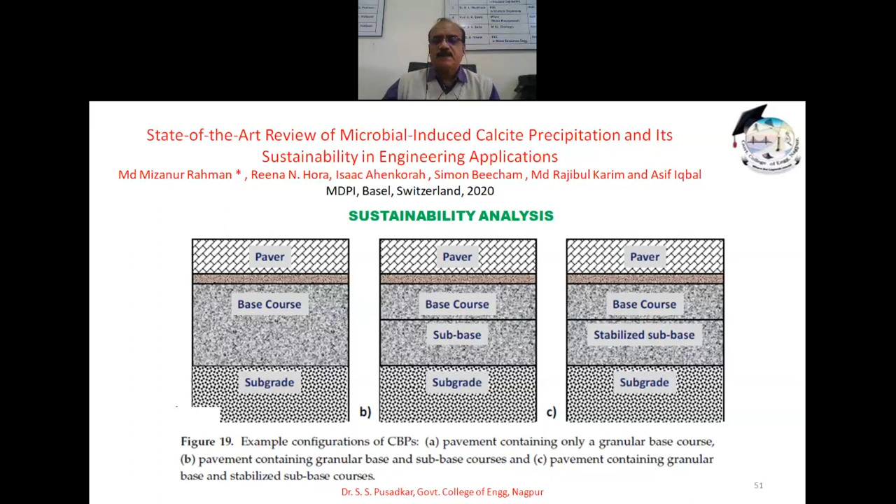Excuse me, yes, hello sir,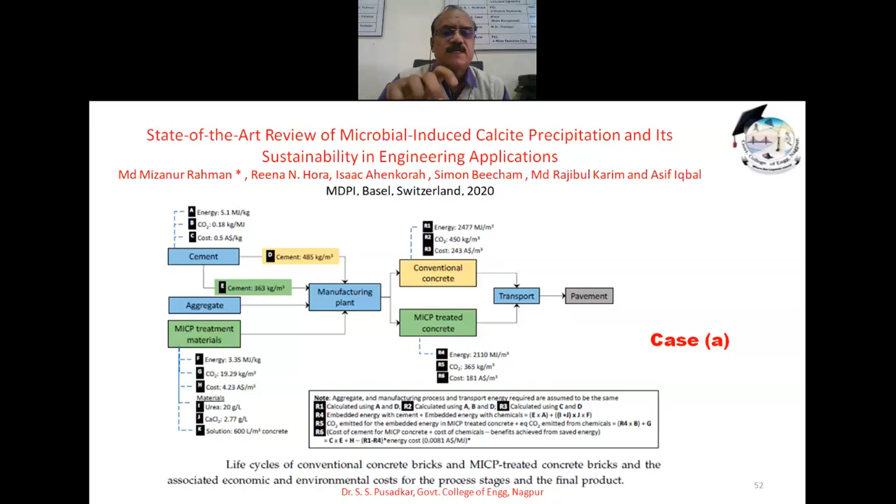So he has taken into account a 1 kilometer road, and based upon that 1 kilometer road length, he has of course done the microbial treatment analysis and cost analysis. The cost as of today is not available, but he had assumed some values based upon the reaction treatment required and the period required. So after manufacturing, if you go to the manufacturing plant and prepare your conventional concrete and MICP treated concrete, now he is talking about only MICP concrete and conventional concrete.

So when I am using this MICP treated concrete as a material for road construction, it shows the reduction in the energy consumption from 2477 to 2110. The carbon dioxide has been reduced from 450 kg per cubic meter to 365 kg per cubic meter, and the cost is also reduced. So if I use this microbially treated concrete in the pavement of your roads, we will definitely go a sustainable way for the construction of concrete pavement.

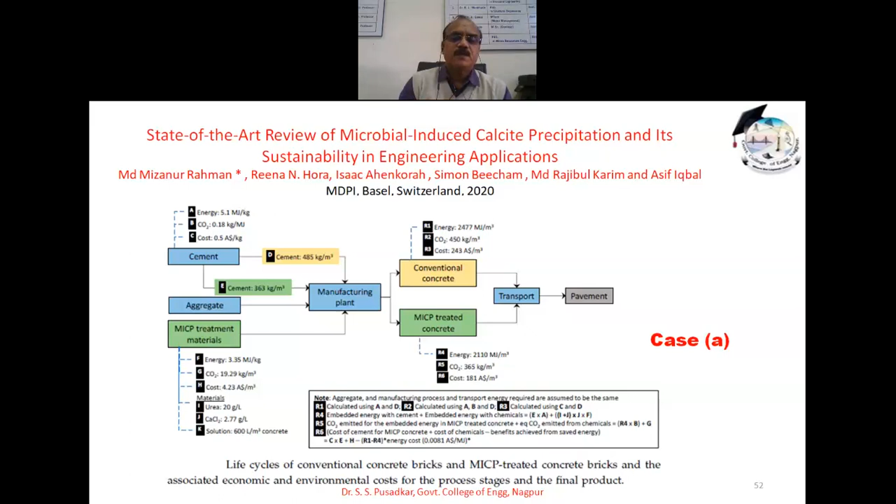What has been illustrated by this paper, he has demonstrated the same study here also in a different manner. So environmental cost and economical cost for MICP treated pavers and conventional concrete pavers. So what it shows here is that the MICP treated paver block will have 19% environmental benefit, whereas as per economy it will be 25% cheaper than your conventional cement concrete paver block. So this definitely shows a sustainable way of using these MICP treated blocks for construction.

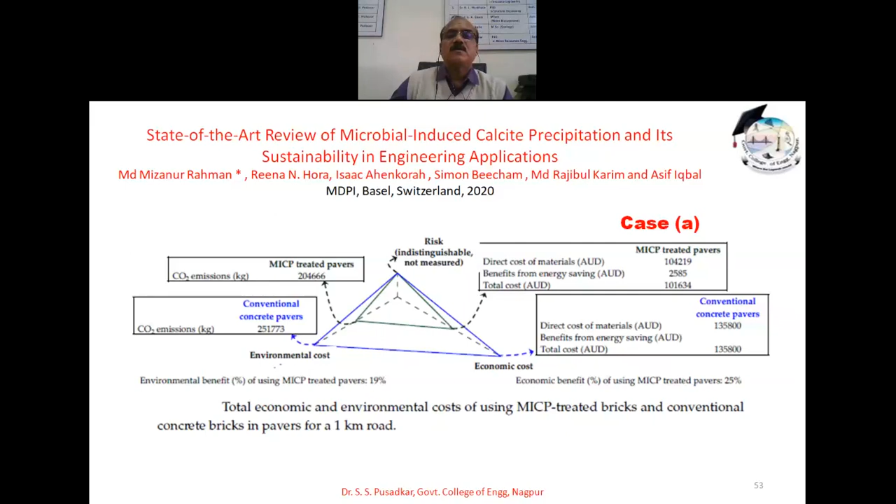Now he had studied the treated stabilized subbase and cement treated stabilization, and the pavers are common for 1 kilometer. So in case B, what he has taken is MICP treated stabilized subbase and the paver, and the cement treated stabilization base. Okay, but he observed in this case that the environmental loss by using MICP treated stabilized subbase and the pavers is 339%. So this is showing it is not a sustainable way. And for economy also, there will be an economical loss if I use MICP, to the extent of 166%. So as I said, it may change case to case, and hence you have to verify before using this treatment whether it is sustainable and economical or not.

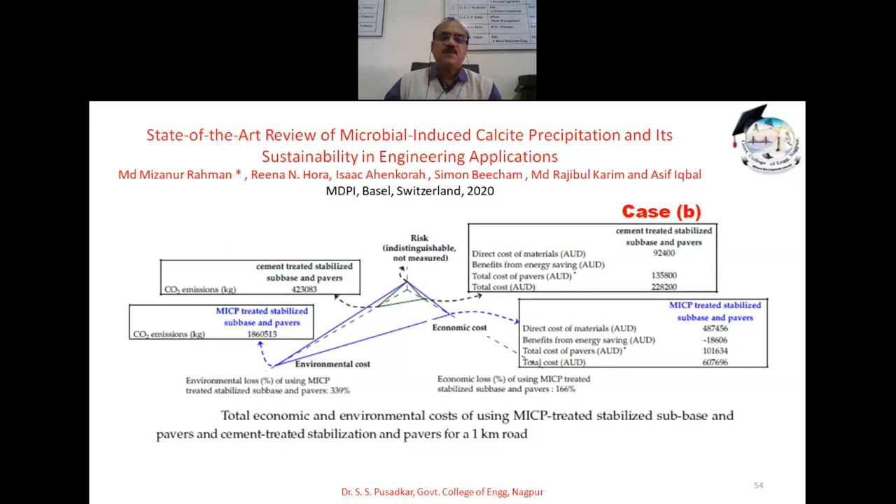The third case is when he has done MICP treated subgrade stabilization and the paver, with cement treated stabilization and the paver. So he observed that both losses are reduced to a great extent. Okay, environmental loss reduced from 339 to 19%, and economical loss from 166 has been reduced to 9%. So when he changed the process, both the economical as well as environmental impact showed the effect. So a lot of work is required in this area so that it will go a more sustainable way.

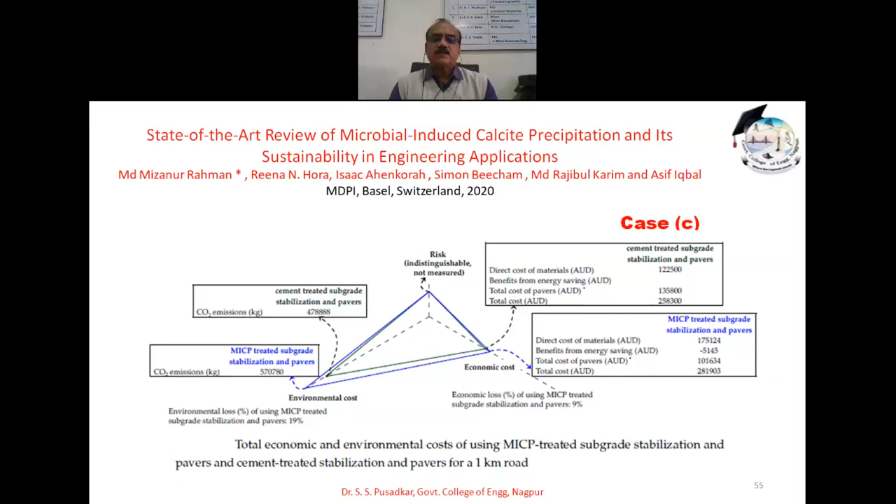And what is put in the next slide will show you that in the sustainability analysis, two of the three MICP treatment scenarios cost more and had a larger CO2 footprint, and thus may not be an economically viable and environmentally sustainable technology, at least at the current time. That is the main point. You have to understand this is not economical at that particular point of time, but if I change the technology, change the methodology, definitely MICP will be a more sustainable approach than any other approach.

So alternative sources of nutrients might lower the cost and environmental footprint. A number of alternative solutions are currently being explored. As I said, this is a growing area for research. With further research, this technology can potentially be cost effective as well as environmentally friendly, particularly since it uses a natural process. The use of biological and other waste effluents in the process will further enhance the environmental benefits in terms of reducing CO2 and energy footprints. And therefore, it emphasizes that MICP treatment will be the most sustainable approach for improvement of your soil or for construction of your pavement. In the next 10 years, definitely it will take that shape.

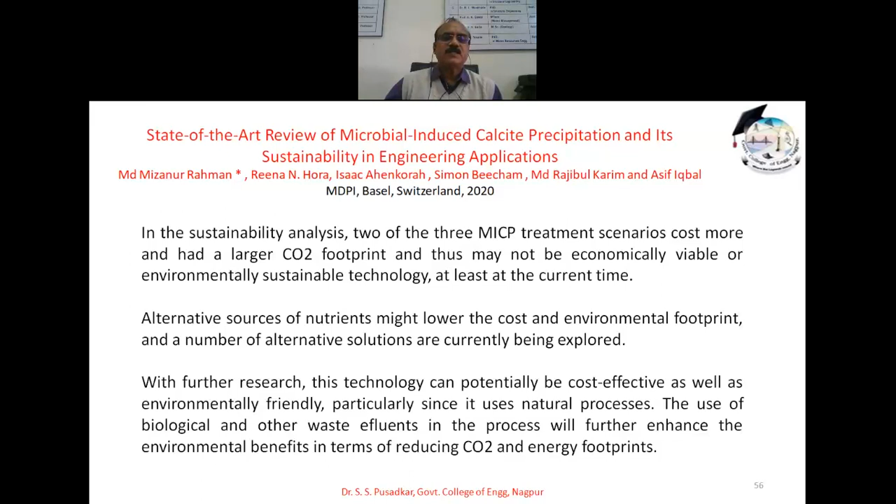So that improvement part is over. Now I go to another approach for a sustainable way, by providing a porous pavement or providing a recharge bed for rainwater harvesting.

As I said, this is the permeable parking lot construction done at one particular site. As this parking lot is used for the recharge bed concept, the same concept can be used for the pavement. If you are constructing the porous pavement, a lot of work is going on in porous pavement also, and you can have the storage tank below. So the surface water will drop into the storage, and we can save from flooding

most of the area. Now we are seeing major cities like Mumbai, Chennai, or even international ones getting flooded because we have trapped all the natural pathways for the flow of water, and everywhere we have done cementing or bituminous carpeting. There is no way for seepage or for the groundwater to be recharged, and hence this particular concept is also a most sustainable approach for recharging our groundwater.

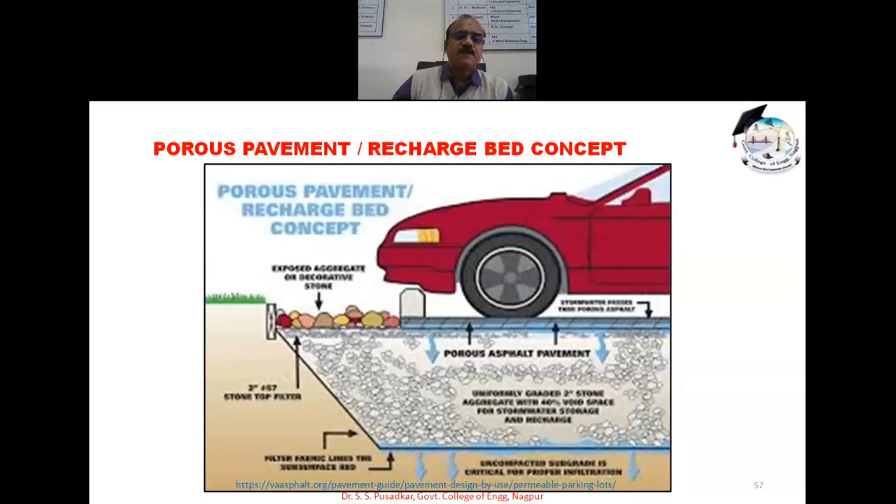So you can construct the porous asphalt pavement or the concrete pavement and recharge the groundwater. This is one more concept used in sustainability of the pavement. Now, when we are constructing the embankment, the embankment has to be protected from erosion. Nowadays, there are many methods available for protecting these slopes, say by using geonets or shotcrete methods, or by some facial walls, retaining walls, and so on.

But if I want to go a sustainable way, definitely I should use this bioengineering concept to control this erosion. Naturally, if there are trees grown on the ground surface, they will serve both purposes. They will control the environment, and also they will reinforce the loose soil mass which is above the bedrock. So that natural reinforcement of the soil protects the soil from erosion.

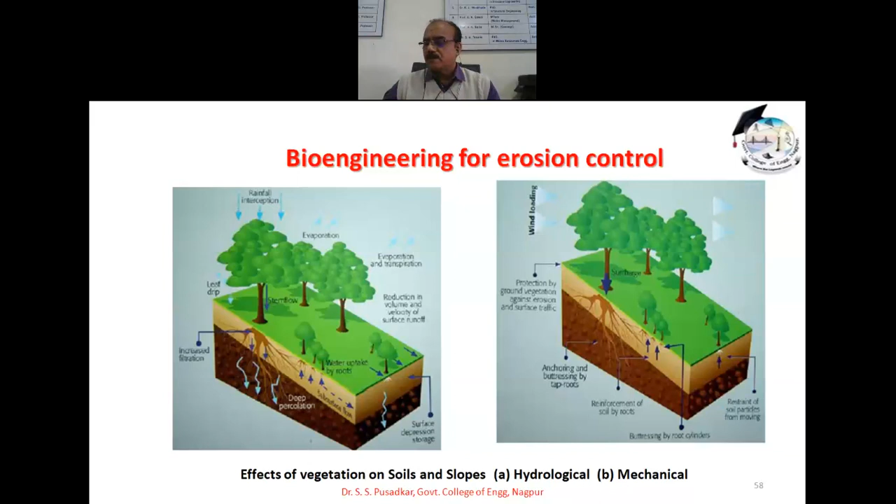Nowadays, a lot of trees are cut, they are uprooted from the ground, and we are making the soil very vulnerable, and the erosion of the soil is continuously going on during the floods. A lot of soil is moving into the sea. This is the major problem for us, because if the fertile soil is moving, then there will be a problem for your food production.

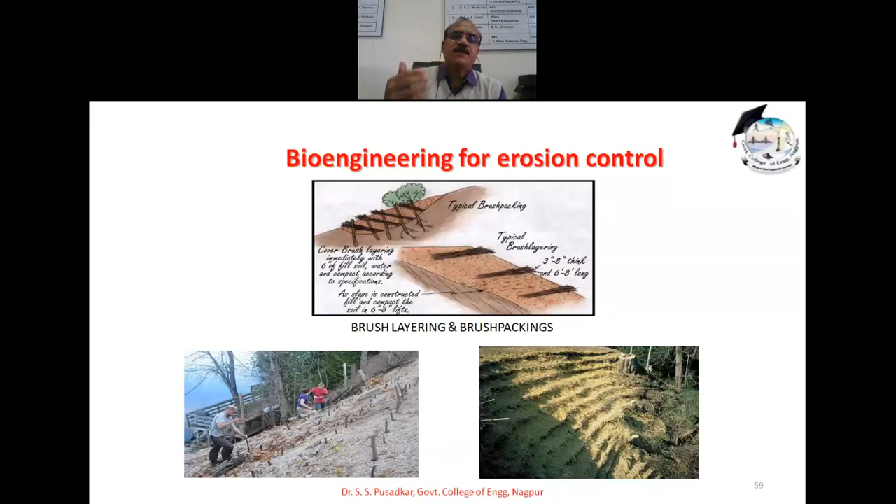So there are many ways we can protect these hills, by providing brush layering and brush packing. All these materials are natural materials. They put 3 to 8 inch thick and 6 to 8 feet long sticks, making steps to prevent the movement of your fine soil. This will be protecting, and over the years that area will be filled up, and we can protect the slopes from erosion.

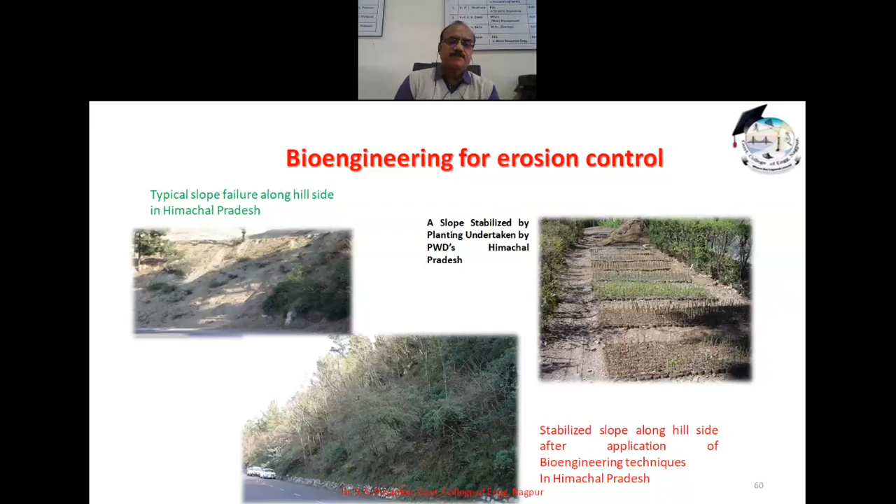Another is the typical slope failure along the hillside in Himachal Pradesh that has been protected by planting, undertaken by the PWD Himachal Pradesh. This bottom photo shows you the stabilized slope along the hillside after application of this bioengineering technique in Himachal Pradesh. So they had implemented this process to protect the hills also.

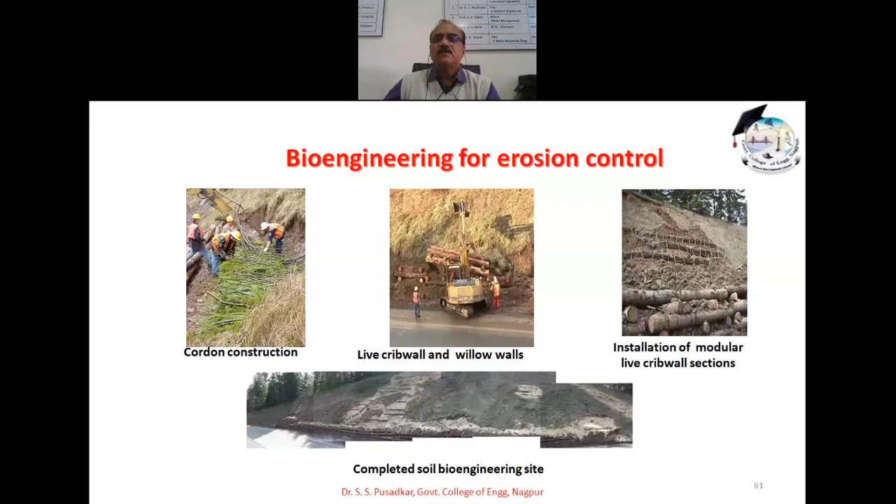Another way is by cordon construction. You can construct a heap of natural materials, and then it is filled with soil, and naturally after a few months or years they will be covered by grass, and the soil mass will be protected. So this soil bioengineering site photograph at the bottom shows you how it can protect the soil mass. So I come to the end of my lecture.

As concluding remarks, sustainability is the need of the hour. Pavement construction is a process which consumes a large amount of earth materials, and hence we need to reuse waste materials in pavement construction, and that will save a lot of natural materials. Naturally available fibers and polymers are to be used for soil improvement. Microbial soil improvement has great potential in green engineering, and definitely in the next 10 or 20 years this field will grow, just as geosynthetics have in the last 30 years.

Porous pavement development is necessary to recharge the groundwater. That is just a beginning. The thought is coming up now for preparing these porous pavements, and how it is implemented, let us see. And the last one is bioengineering, which is used for erosion control of the slopes and the hills, and is to be potentially used. This will save us both ways. It will protect the slope as well as give you greenery surrounding you. So with this, I conclude.